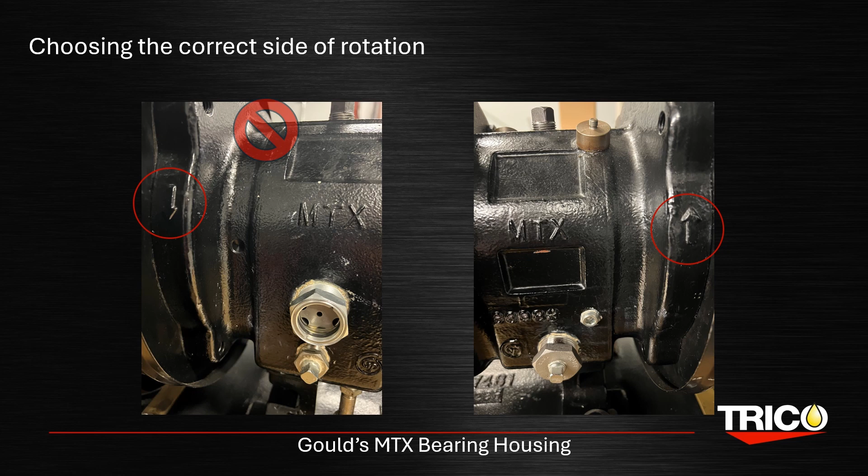The first thing we want to do is select the correct side of rotation of the shaft for the oiler position. If possible, you want the side that the shaft is rotating upward toward where the oiler will be. In this case, it will be the side on the right.

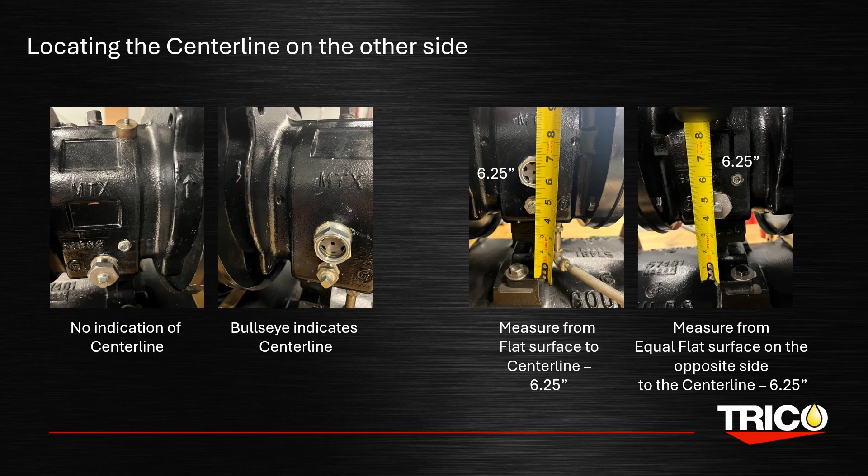Unfortunately, the correct side of rotation does not have a bullseye or any other indication of where the centerline is. So, we will need to measure the distance from the baseplate or footing to the center of the bullseye sight glass. Once we have that measurement, measure the distance from the equally flat surface on the other side to 6.25 inches. Mark the centerline distance with a permanent marker, or something visible against the bearing housing.

Measure the distance from the oil level centerline to the centerline of the port you intend to use. The distance needs to be 0.09 to 0.84 inches, which is the adjustment range for the closed systems, to use your selected port.

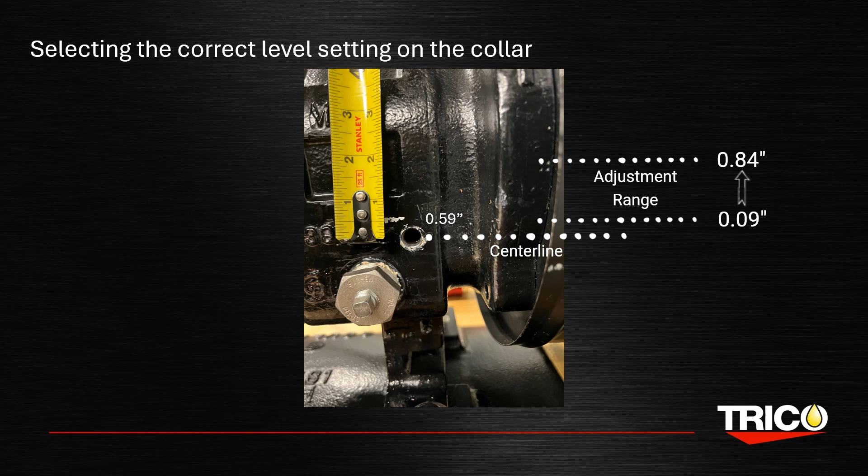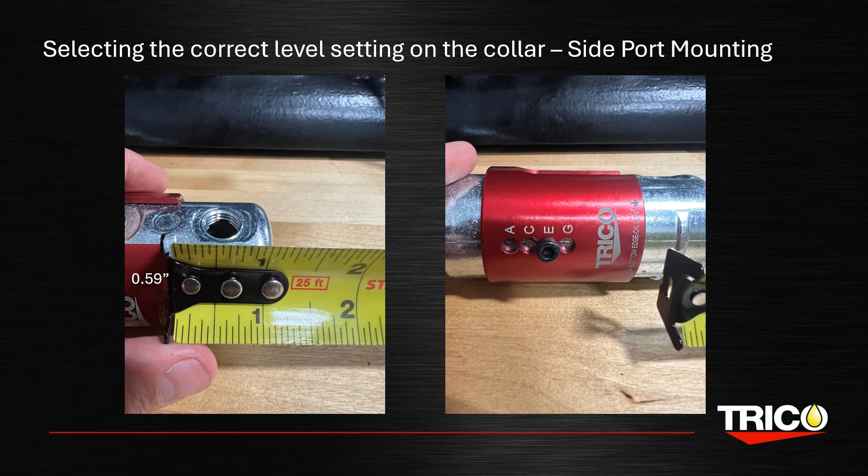Measure the same distance from the centerline of the lower side mounting port on the oiler base to the bottom of the red collar. Find the correct mounting hole labeled with the letters A through G on the collar that aligns closest with one of the mounting holes on the oiler base. This can be on either side of the collar. The collar mounting holes, A through G, are in 1/8 increments.

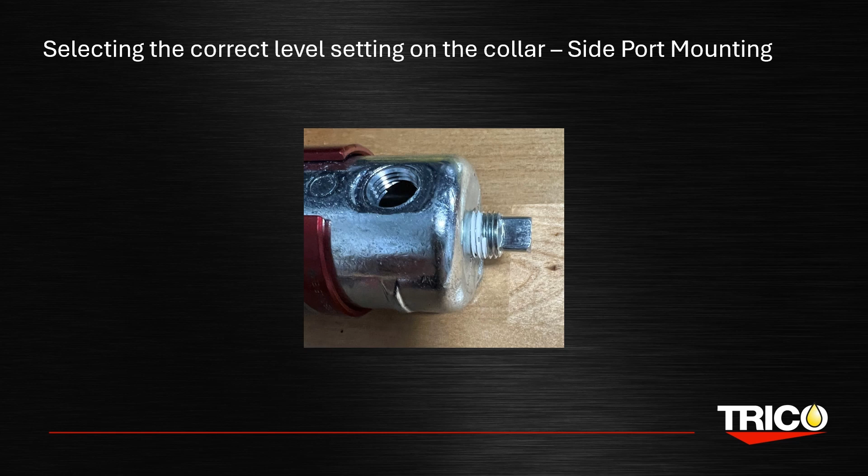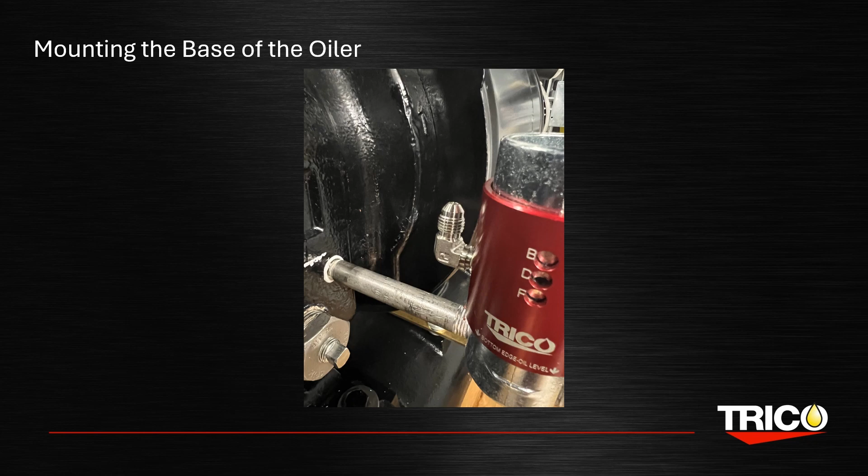Use the supplied plug to plug the bottom port of the oiler. Select a 1/4 inch NPT stainless steel threaded pipe long enough to ensure no interference with the upper reservoir. Install the elbow fitting into the 1/8 inch NPT port on the back of the oiler base. Verify the bottom edge of the red collar is equal to the centerline marking.

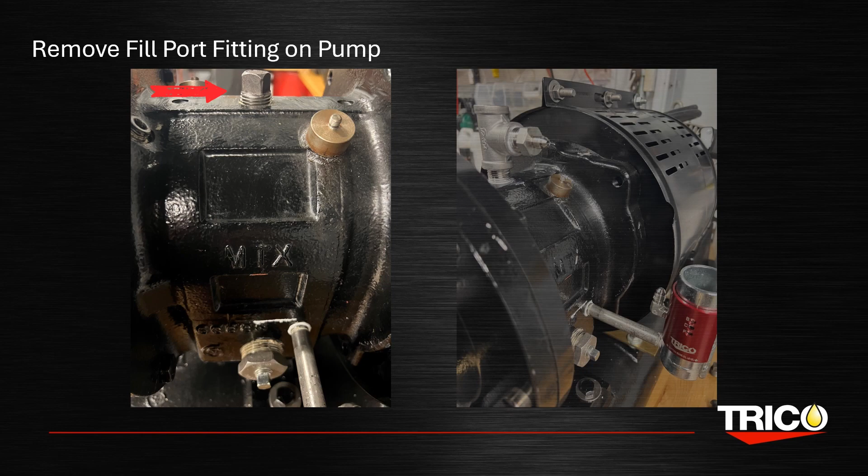Remove the fill port on the top of the bearing housing and replace it with a pipe nipple, T-fitting, and the 1/2 inch NPT adapter. Install the pressure balancing line and a desiccant breather.

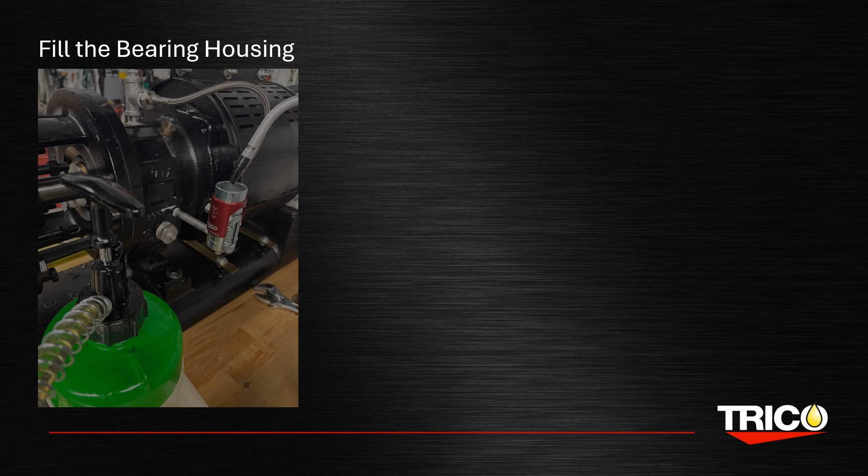Fill the bearing housing to the centerline of where the oil level should be. The oil should be at the red collar's lower edge and in the middle of the bullseye on the opposite side of the pump.

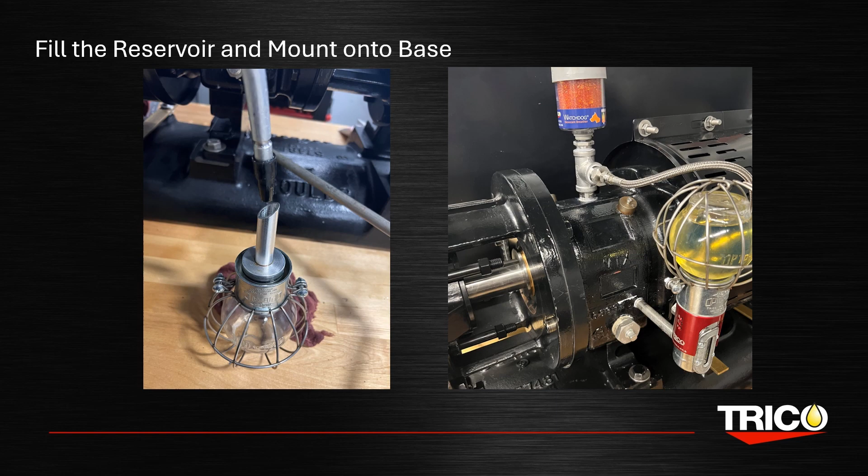Fill the upper reservoir until the reservoir is full, leaving the bottleneck and spout unfilled. This will make it easier to install and allow for an air gap at the top of the reservoir. Install the reservoir by placing a finger over the spout hole and flipping the reservoir upright onto the oiler base. Document the oil level setting for SOPs and future reference.